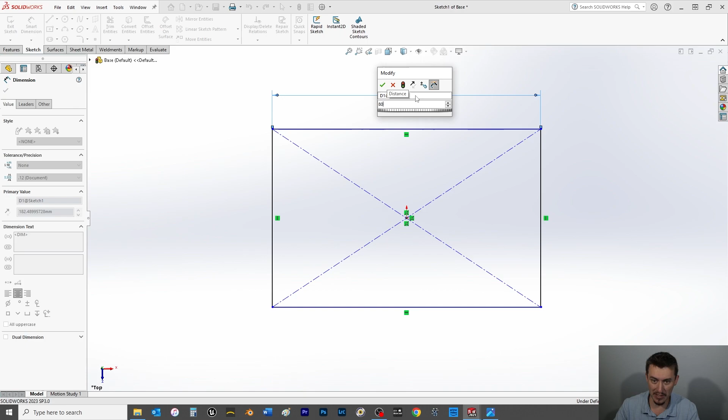And this is going to have a length or width. We'll call this the length for all intents and purposes of 80 mils. Our width is 50. And then finally, that's fully defined. So now we'll just do the final part, which is extruding it. We'll come over here into the Features tab. And we'll choose Extrude Boss Base.

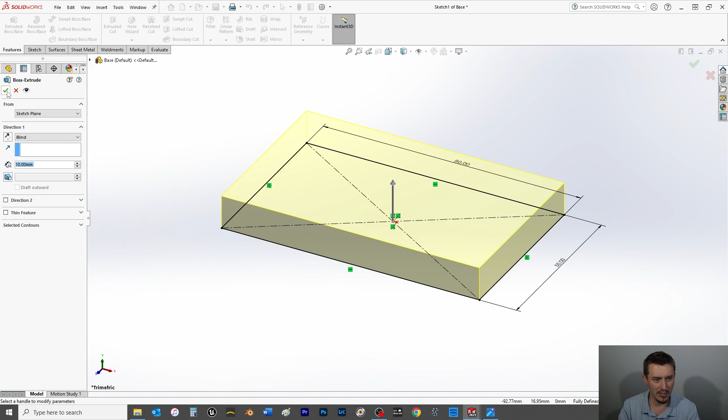And for this one, I'll actually leave it as a blind end condition. And its thickness is 10 mils, which seems to be its default. So 10 mil there, we're all good. So we can click OK. Control S. And then from here, we can right click and we can choose a color.

It doesn't actually specify materials for these parts, but they all do have different colors, which will make them kind of easier to see visually, that is, in the assembly of things. So they use kind of some light blue that looks something like that. Not exact, but that's okay. We already have the spur gear wheel, which is kind of bluish, so why don't we just choose something, I don't know.

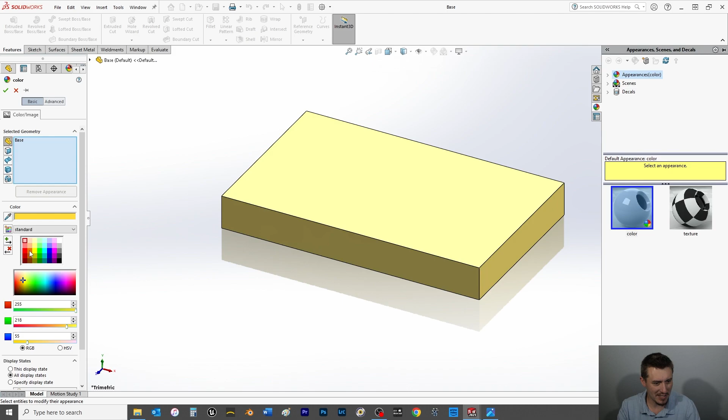How about yellow? Oh, we have something like that too. Something semi-orange. Pumpkin spice, as they say. Alright, so that concludes the base.

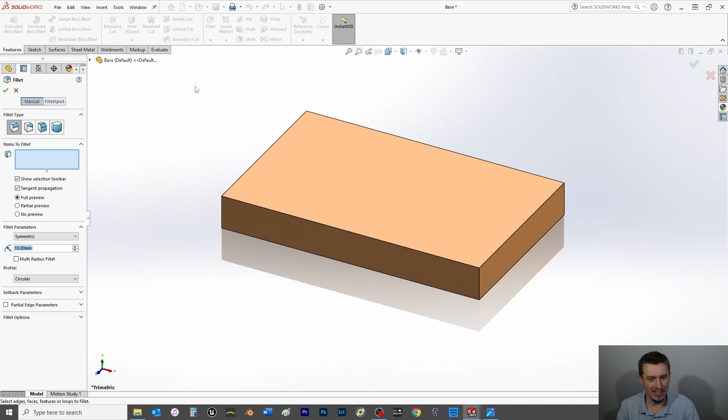And it's so jagged. So we're going to add one little flare to it that this doesn't have. Just the top section will do 1mm size fillets. I'm going to just select this top edge and these four corners here. Taking liberties, taking it a step further. And we'll click OK. And I'll hit the space bar, bring it back into an isometric, and hit Control S.

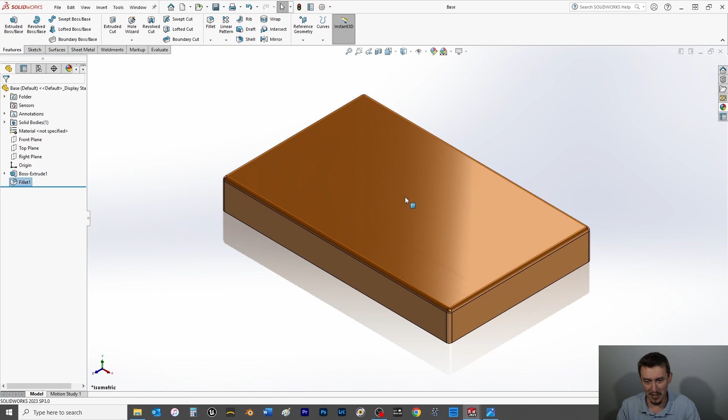Now keep in mind in the assembly, this could potentially influence how things get assembled together, but we're going to work off of planes for the most part to make it simple. Hence why I always choose the center of this part for the origin. So, with that, we'll close out, and I already have the pin ready to go. So, again, Control S, save it as pin R1, however you want to do it. Whatever name makes sense to you.

And then from here, now this one, we're actually going to choose, let's see, the right plane for this one. So again, I'm going to draw this two different ways. So to start, let's do the more complicated way. We're going to choose a right plane and bring that normal to. And we're going to choose a sketch. And we're going to choose a midpoint line.

And we're going to make the midpoint of that midpoint line coincident to the origin. And then we want a horizontal relation. Click drag out. Length doesn't matter. And we're going to right click, choose select. Then we'll right click on the line, and over here, construction geometry, we want to make sure it's turned to a construction line. You can also click on the line, come over to the properties, and you can select for it to be construction or unselect it to be a regular line. We want this to be construction because this is going to be an axis of revolution.

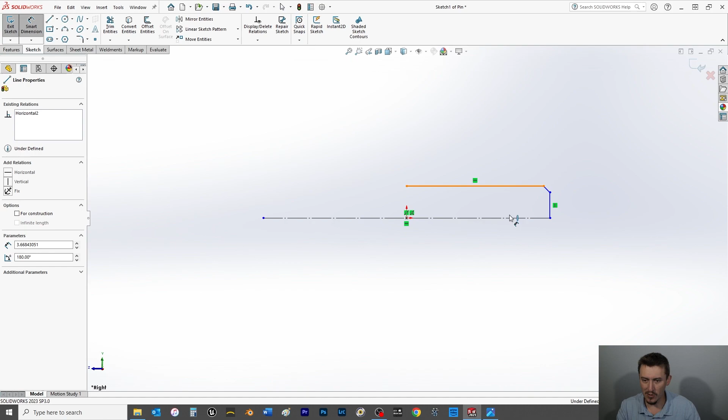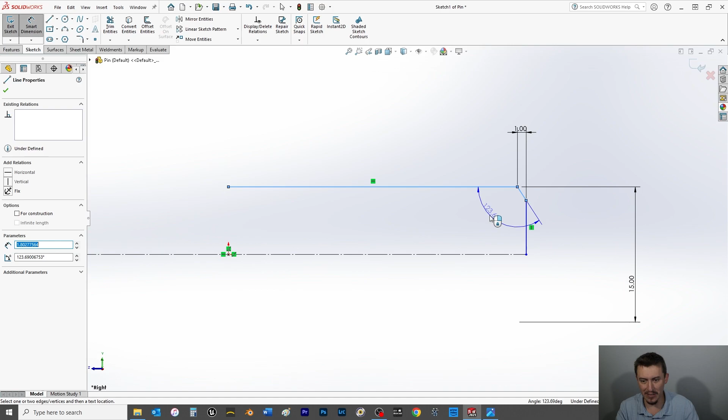Then from here, we're going to take one line and we're going to go this way, and then we're going to do this and this, and I'm going to stop halfway. Now from here, we're going to make this top dimension. Notice something here, we're going to double it up. The diameter of this is going to be 15 mils. And then from here, oops, close out, grab the smart dimension again. This is 1 mil. And then this here, we're going to make an angular. We'll go this way, 45. We're making a chamfer this way.

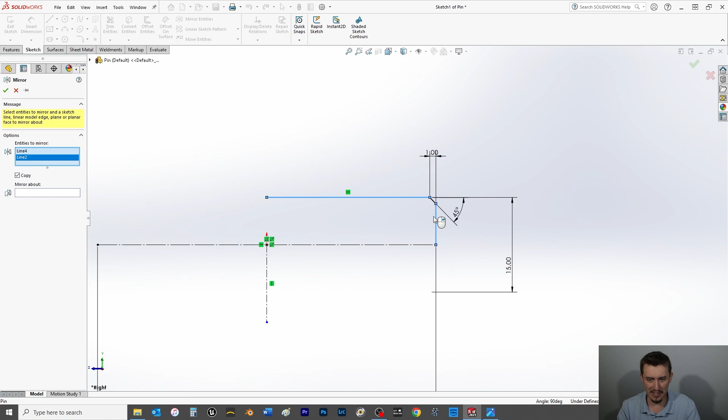Now finally, we can make our overall part dimension based on this axis at 55 mils. That's going to fully define things to a degree. Now what I want to do here is mirror this. If I choose to add another center line, and this one doesn't have to be fully defined, it just needs to have a vertical relation and a coincident relation here, I can then mirror all these entities here and choose this.

And now what's going to happen is when I go into a revolve feature, we have two axis options, so it's not going to automatically select it, which is fine, but I decided I wanted to mirror this geometry here so I don't have to dimension it twice. There's a couple of different ways you could approach that, but this is definitely one way to do it. Another way I could do it is I could have drawn all of the geometry on one side, and then used relations to make things the same. But I chose to do mirror.

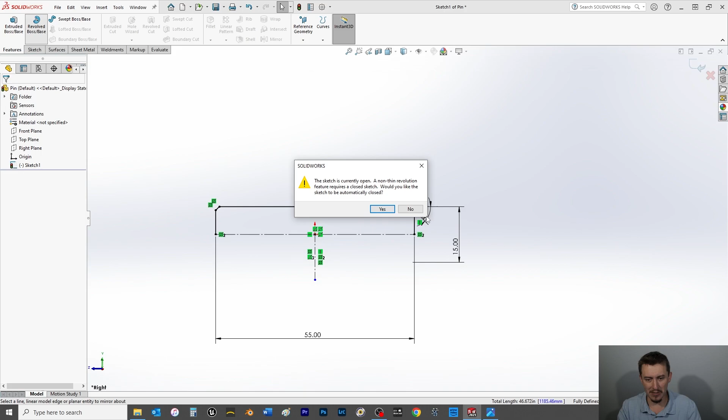So from here, we're going to go to the Features tab. We're going to choose Revolve Boss Base. Now notice it's saying, hey, this isn't closed. So I'm going to say no. And I'm actually going to close out of this for a moment, and we'll close it ourselves. So while this was originally a center line, and I thought, okay, I'll just use that as an axis of revolution, we still can do so.

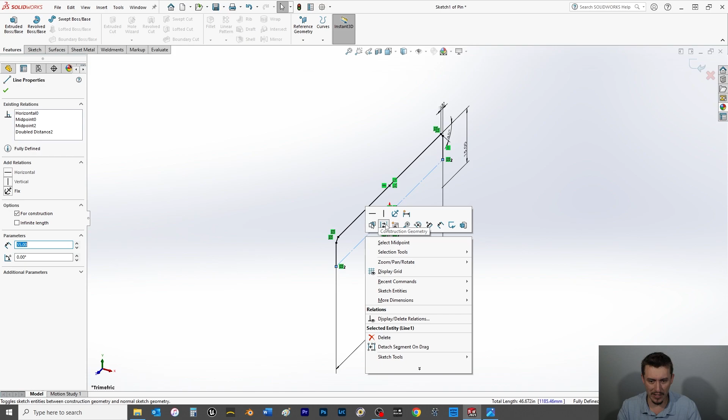But we're actually going to right click and turn it back to a regular line, and now we'll do our Revolve Boss Base, and we'll still choose that as the center of revolution. 360 degrees, click OK, and I'll hit the space bar to bring it back isometric, and hit Control S. And that's one way to make this pin.

So the other way, in this particular case, is a little bit more simplified. If we had a more advanced profile, it would make sense to do it that way, but this one's kind of simple, so we'll actually do it a different method. So what I'm going to do, in this particular case, is suppress this entire situation. And over here in the feature tree, I'm going to show you a unique trick. This bar here, you can roll back to previous features, which will then suppress them.

So now what we're going to do is choose the front plane, Control 8 to bring it normal to, and then I'm going to come back over into my Sketch tab. I'm going to choose the circle. I'm going to make the origin the center point of the circle, click and drag out. Size, we're going to give it the smart dimension of 15 mils.

And then from here, this is where this is going to be a better and simpler choice. This is pointing out to you, again, how you may approach modeling a part depending on the type of control you need and dimension predictable change capabilities you need. So from here, we'll simply go over to our Features tab. We're going to choose Extrude Boss Base, but this time we're going to do an end condition of midplane.

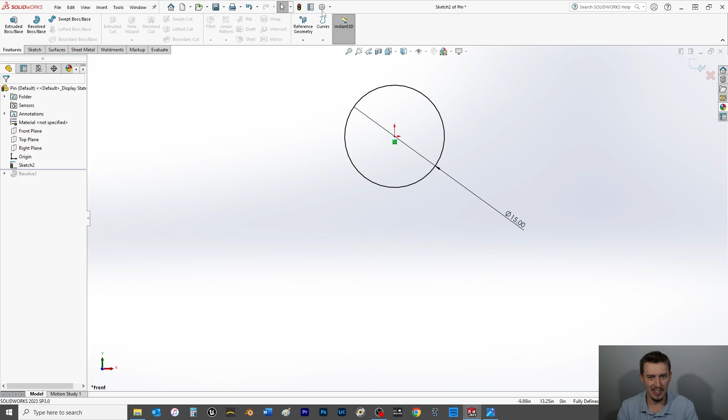And then, now I'm just noticing something. By suppressing that feature, oh, I stand corrected. We've actually been doing this drawing with the incorrect dimensions. So, come up here to Options. I forgot to save this with these unit selections. So, Document Properties, Units, switch to millimeter gram second, click OK, which means everything is about to change dramatically.

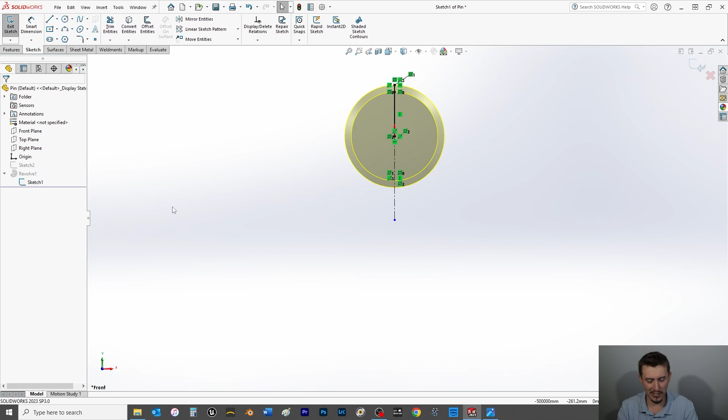So, first, right click, and I'm going to suppress sketch number 2. I'm going to bring my revolve and unsuppress it. And we're going to see that everything is going to be wrong in this sketch. So, switch this to 1 mil, switch this to 15 mil, switch this to 55 mil, click OK. Notice how it got a lot smaller.

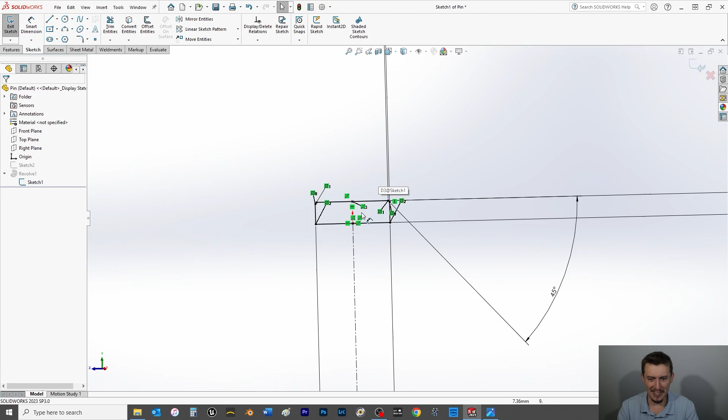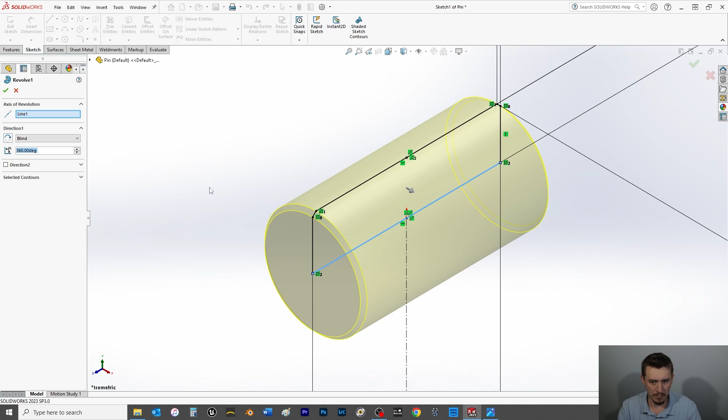And then from here, spacebar to bring it isometric, exit the sketch, and then I'll spacebar isometric again to bring it back in. Yep, looks good. Alright, so now that we've corrected that, it's a lot smaller than it originally was, because I was in inches. Now we can right click, resuppress this, and we'll go back to the other method of drawing it, unsuppress this.

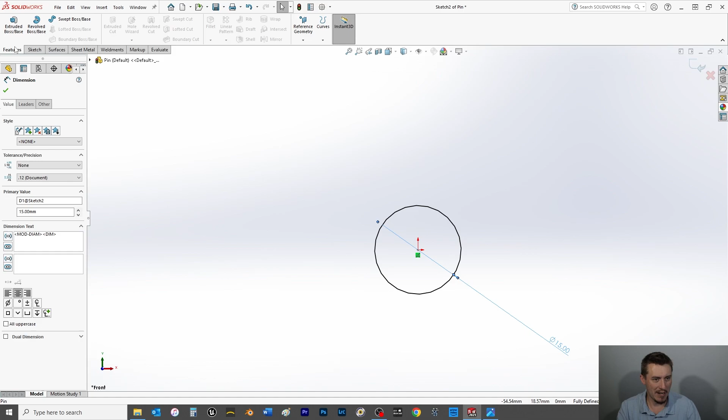So in the sketch we'll edit, or in this case I'll just do Control 8 to bring it normal to. This is a massive diameter. We need to reduce this to 15 mils. Drag this back up. There we go. Now we'll go back over to our features. We'll do the Boss Extruded Base, 55 mils, and it's going to be a mid-plane end condition here. Click OK. Spacebar to bring it isometric.

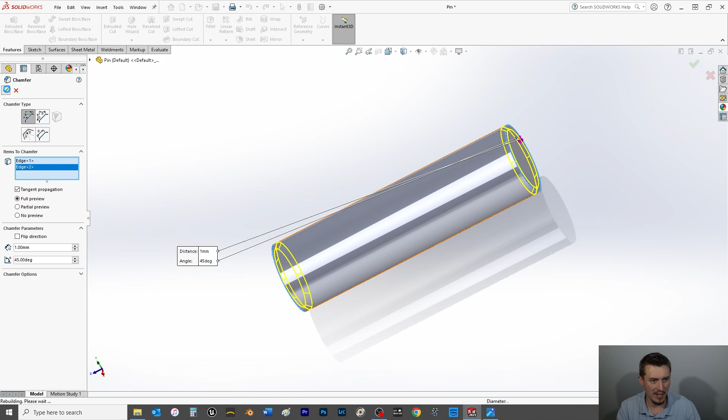And now from here, we're simply going to go up under the Features tab, and under the Fillet drop-down, choose a chamfer. It's going to be a 1 mil chamfer, 45 degree. Then we can select these two edges here. And just like that, we've also made the pin this way.

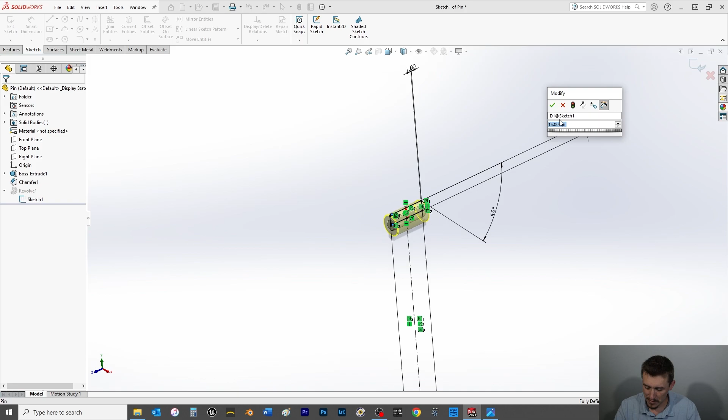And if I unsuppress this, let's see what we got going on here. Something is wrong in sketch 1. I think that's a radius. Radius of 15, divided by 2. There we go. Now they'll match up. And now you'll notice they're the exact same. So if I suppress this, the pin's still there.

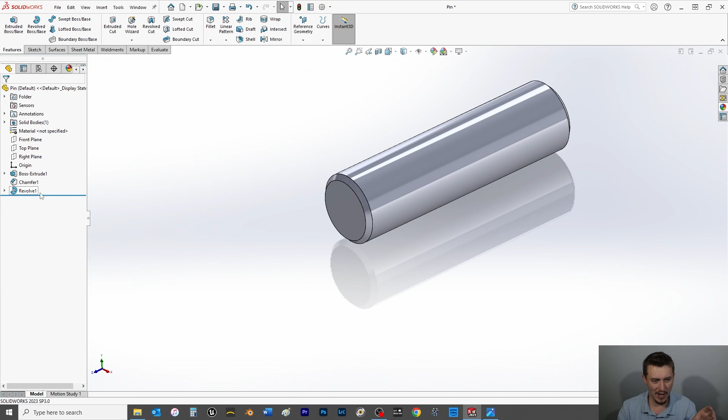If I unsuppress this and press Control and select these two and suppress them, the pin, oops, it did. Well, what I would have to do is bring this in front of, if it's going to let it, it won't in this case. So in this case, it's just a demonstration of showing two things going on in one drawing. But normally, you pick one style or the other. To have the exact same model two different ways in the drawing is redundant and would cause undesired results if you wanted to change something. So, in this case, I'll keep the more complex way I did it.

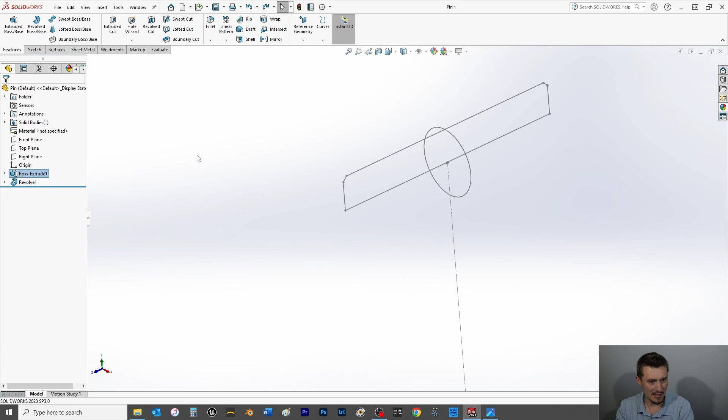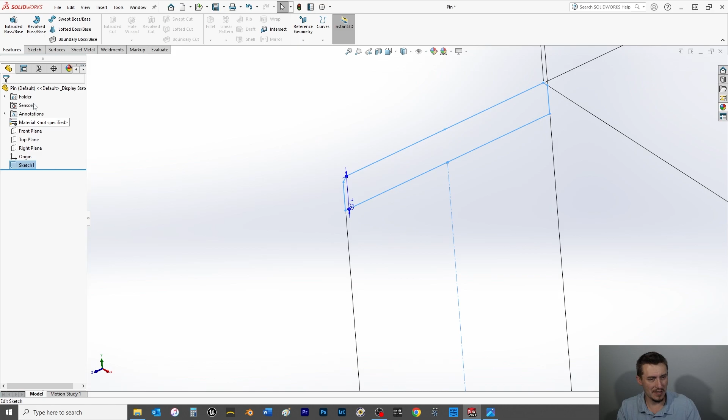Oops, we went too far. Boss extrude, delete this. Sketch 1, sketch 2, let me hide these. Delete this, yes. It's taken away that revolve feature. So, I will bring it back. There we go, and then we'll add a color to this. And let's make this one like light green. I don't think they have that, because I've already made the other part some kind of pumpkin spice color.

So that is it for the remaining parts for the pawl mechanism. Again, next Wednesday we will assemble all of these items together and then throw together a little cut sheet drawing just labeling the parts.